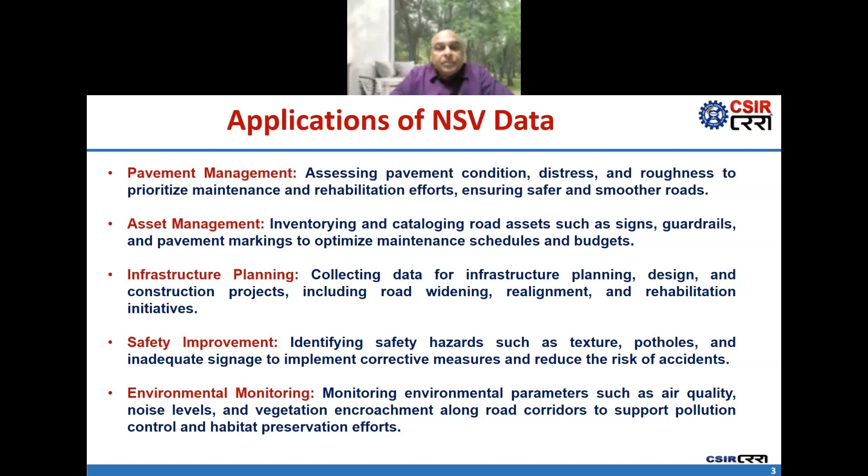So if you are monitoring environmental parameters such as air quality, noise levels, and vegetation encroachment along road corridors, we can support the pollution control and habitat preservation efforts also. So this is a new thing. So we can ask the NSV OEMs to put some more sensors on network survey vehicles so that we can collect environmental data in future. This is a new dimension for the work we are doing.

Yeah. So this slide is on the road safety related issues, which are very important nowadays on our Indian roads. We are collecting a lot of parameters using the network survey vehicle system. But right now we are just using the network survey vehicle data for road maintenance and planning purposes, not for road safety audit purposes, but we can use this technology for road safety audit also.

iRAP is one initiative where you can utilize this data. Friction data you can get indirectly using the network survey vehicle in terms of the macro texture depth. We can get the information related to the cross fall, hilliness, that is in terms of rise and fall data, edge deformation, that is in terms of the pavement surface distresses. We are collecting longitudinal unevenness, that is the riding quality, the longitudinal profile of the road, and curvature, that is the horizontal curvature.

We can ensure that the curvature is adequate. Using the network survey vehicle we are collecting the rut depth information through the transverse profile to know the maximum point of depressions along the wheel path. Similarly, we are getting the crack information, the pothole information, macro texture information. All this data is very useful, it will be very accurate, and we can put all this information into the available models related to road safety.

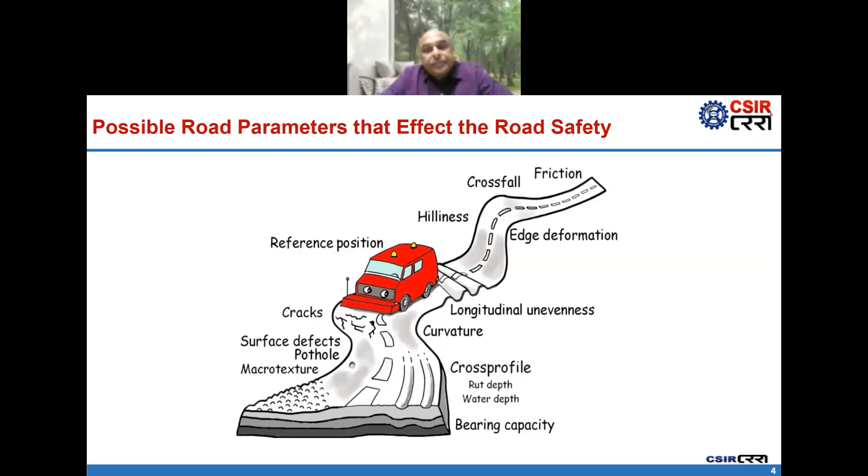So this is one aspect related to the usefulness of the network survey vehicle data, which is very important. I always call this the mantra of maintenance management: pay now or pay more later. We have various stages of road maintenance. The first stage is routine maintenance. The second stage we call preventive maintenance. Then periodic maintenance. Then minor rehabilitation, major rehabilitation, and reconstruction.

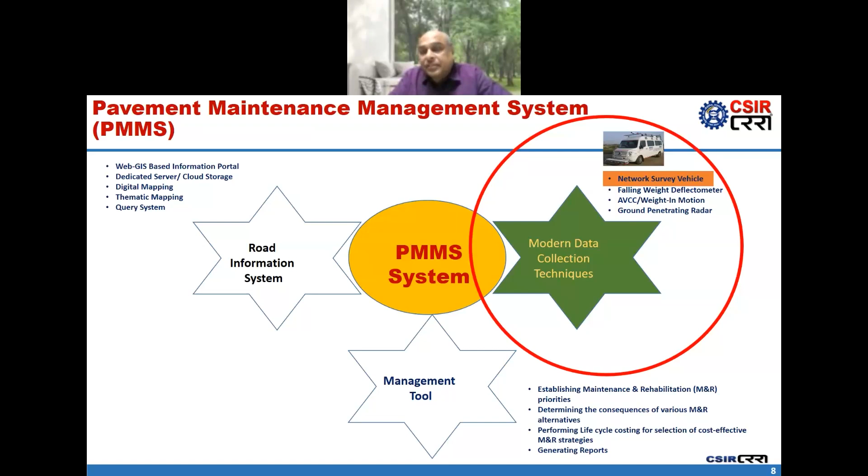Yeah, so I am going to focus only on the modern data collection part, and specifically on the network survey vehicle. This slide actually has a complete 15-day course at CRRI. So today I am just touching only one part, the network survey vehicle system, which I am going to give you insight into. Yeah, so network survey vehicle system. So this is actually the topic; with this background I start.

Actually I am getting some messages, black messages here, and because of that I am getting some difficulty in going to the next slide. Mm, yeah.

Using this technology, which we brought from Australia at that time, we could survey 40,000 kilometers of national highways covering all states of the country, and then a very beautiful web GIS-based national highway system was delivered to the Ministry of Road Transport and Highways in the year 2010. The second system we purchased in the year 2010. This system we used for another study for the Golden Quadrilateral road network. The aim was to develop a management system for high-speed road corridors at that time with the help

of CSIR funding. So if we see broadly, all network survey vehicle systems have the capacity to survey at a speed of 100 km per hour. That means from the minimum 20 km per hour speed; I will also tell you why the minimum speed of 20 km per hour is required. But maximum we can go up to 100 km per hour if your traffic conditions permit you.

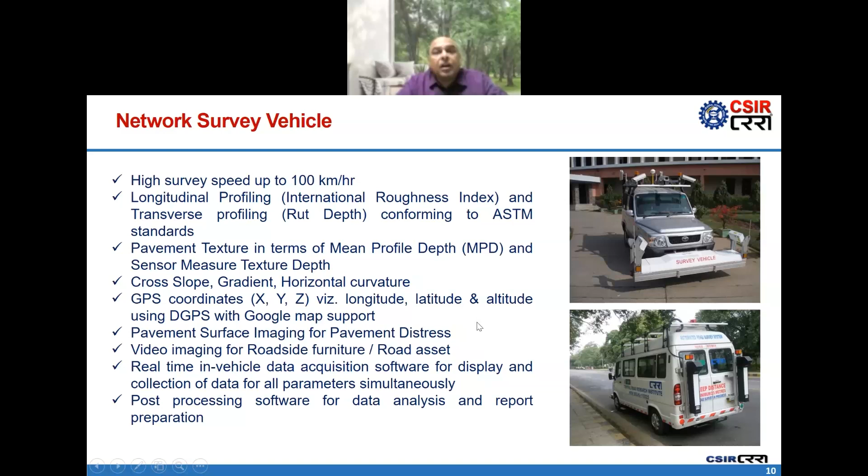Yeah. So broadly, this is our network survey vehicle which we are using. Most network survey vehicles look like the screen you are seeing here. In the front of this network survey vehicle, you can see one laser profilometer. This is a state-of-the-art system, I must say. This laser profilometer has two laser sensors on either end, so that using these two laser sensors, we are generating the longitudinal profile of the road along the wheel path. So when we are moving this survey vehicle in a lane on our national highway, we are getting the longitudinal profile of the left wheel path and right wheel path.

Both wheel path longitudinal profiles we are getting, and then we are using specialized software to analyze the longitudinal profile of both wheel paths to get the International Roughness Index, which we call the IRI value, in meter per kilometer. So this is how this technology works, and the minimum speed prescribed for collection of this information is 20 km per hour.

Because if you are moving below 20 km per hour, the accelerometer present on the top of the laser sensor doesn't work because of the low vibrations, and your results are not reliable. So the most recommended speed for laser profilometers is more than 20 km per hour, and you can go up to 100 km per hour depending upon the traffic conditions.

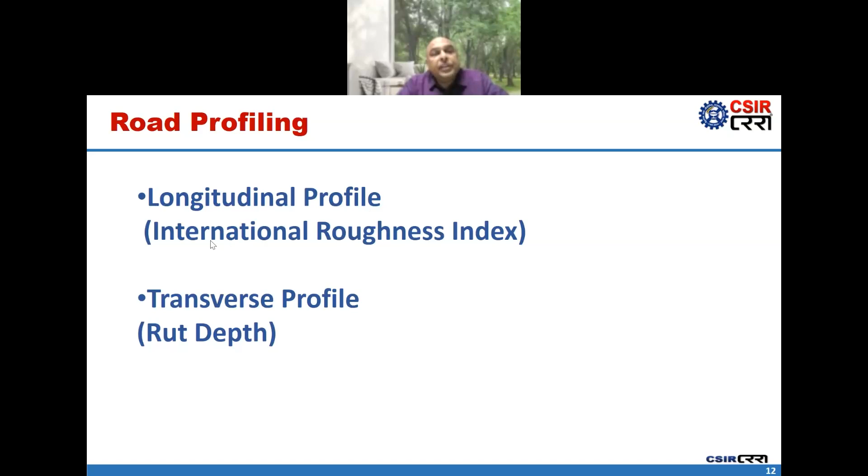Now I will go into more detail and give you some idea and some precautions while collecting these things. Longitudinal profiling, as I mentioned, using the laser profilometer will give you the International Roughness Index, and the transverse profile with the back lasers will give you the rut depth information.

Now let us see road profiling, the measurement of the longitudinal profile, and its accuracy. The laser profilometer here is as per ASTM E950 Class 1 category. What does it mean? Class 1 category means that you are generating the profile of the road at an interval of 25 millimeters, with the highest level of accuracy in the measurement. If your measurement interval is more than 25 millimeters, that comes under the Class 2 category.

So as per our IRC codes and the recommendations for riding quality measurements, we go with the Class 1 category, and all lasers capture the longitudinal profile at an interval of 25 millimeters. Finally, after applying the appropriate algorithms, which is an automatic process, we get the International Roughness Index, IRI, in meter per kilometer. And if we want to convert this IRI to the equivalent bump indicator roughness index, which is our old practice in India, we can use this equation.

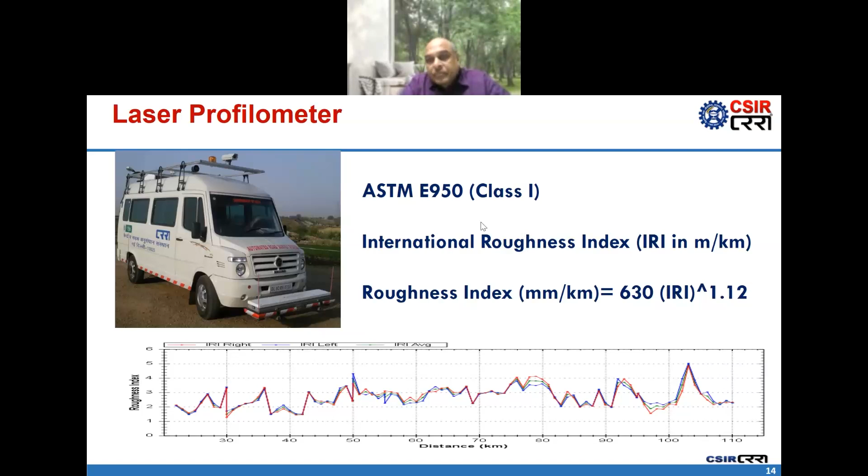Another important thing is that while collecting data, these laser sensors are continuously measuring the height from their position to the road surface. This is the principle of how these laser sensors collect information: the laser sensor sends one signal to the road surface, we get the reflected signal back, and it measures the height from its position.

We also have one accelerometer on top of each laser sensor, which measures the acceleration, that is, the body movement of the vehicle. In physics, if we double integrate acceleration, we get the vertical displacement. So we measure the acceleration due to body movement, while the laser measures the height from its position to the road surface. Finally, we double integrate the accelerometer value and subtract it from the laser results to get the accurate road profile.

One way to check whether your machine is giving you the correct riding quality is to put a known height block between the laser and the road surface. Suppose you put a 25 millimeter block, then your system should record 25 millimeter irregularity. If you put a 50 millimeter block, the system should tell you 50 millimeter. But if you put a 25 millimeter block and your system tells you 30 millimeter or 20 millimeter, that means your machine is not properly calibrated.

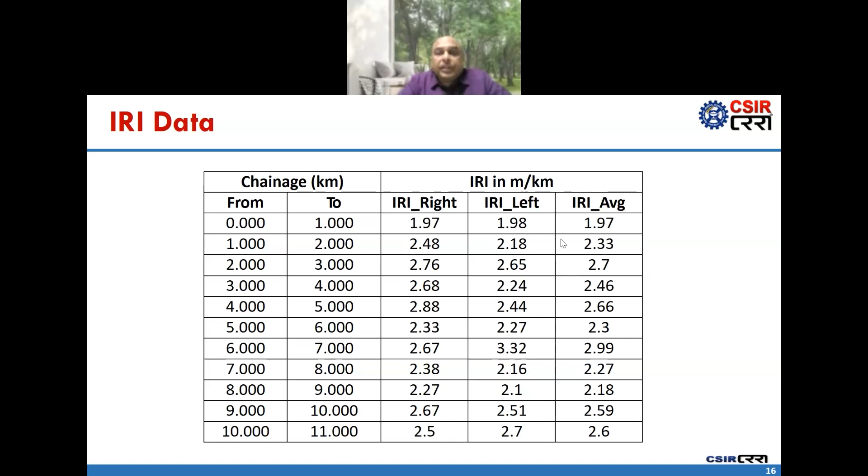I think my screen is not visible.

If you want to cross check or validate the results from the network survey vehicle, you can use any one of these equipments for comparison. These equipments are basically used for calibration of the fifth wheel bump indicator, but you can also use them for validation of the network survey vehicle IRI measurements. This is how we do validation of the network survey vehicle at CRRI.

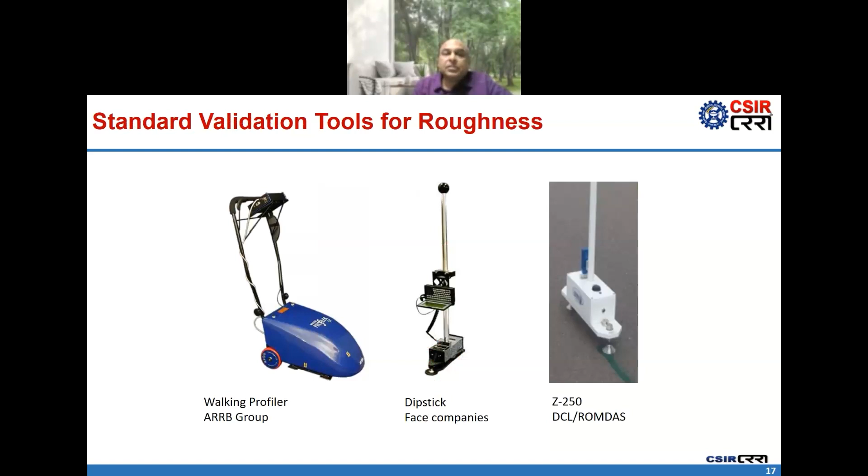Now let us see the road profiling in transverse direction. Again, this is a very important parameter, transverse profiling.

Yeah, again... so still you can see my screen? Sorry. Yes, it's visible, it's visible.

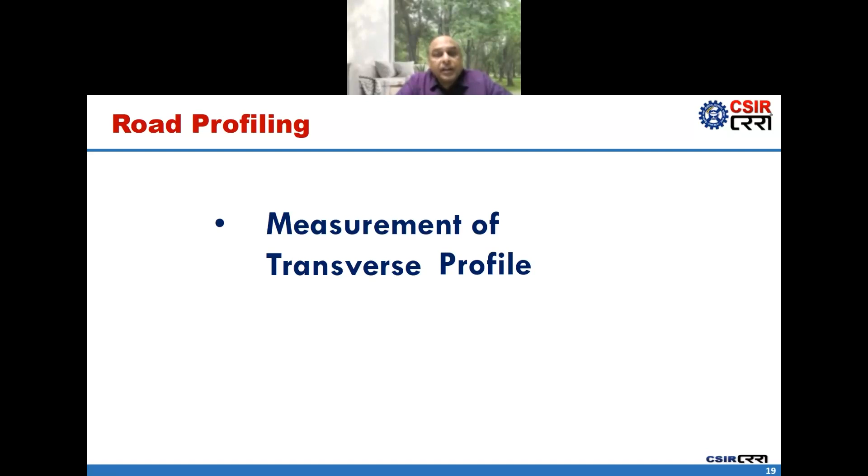So now I think you have some idea about the longitudinal profile, the riding quality, IRI, left wheel path, right wheel path. Now let us see the transverse profiling. How are we doing the transverse profiling?

In transverse profiling, I am seeing three systems in the market. One system is this first one, the first network survey vehicle in CRRI, but some other people are also using the same technique because they want to generate the transverse profile, meaning they want to make a profile of a 3.5 meter lane.

The second technology, which we have been using for the last 10 years, is called the laser rut measurement system. Here we have two laser sensors emitting laser waves, and across 3.5 meters we generate the transverse profile with 1280 points. This number is very high, so the transverse resolution between 2 points is less than 3 millimeters, and we get accurate results for rut depth measurement.

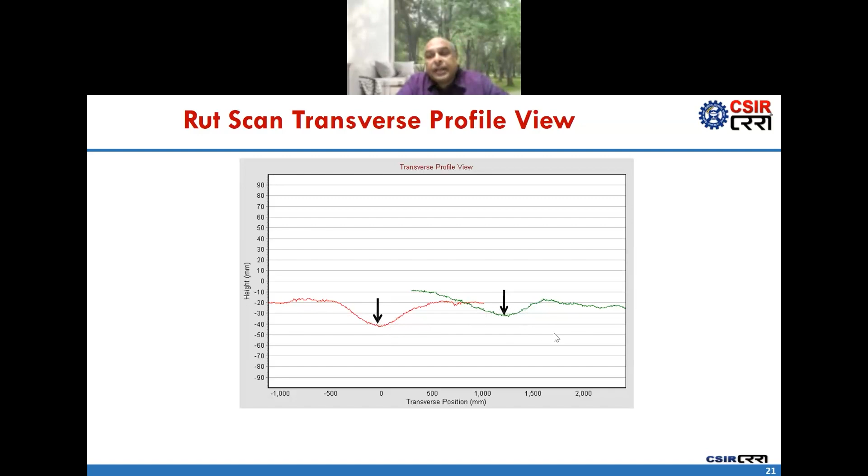Again, if you want to validate these results, the only way is the 3-meter straight edge, the conventional method used to measure the rut depth.

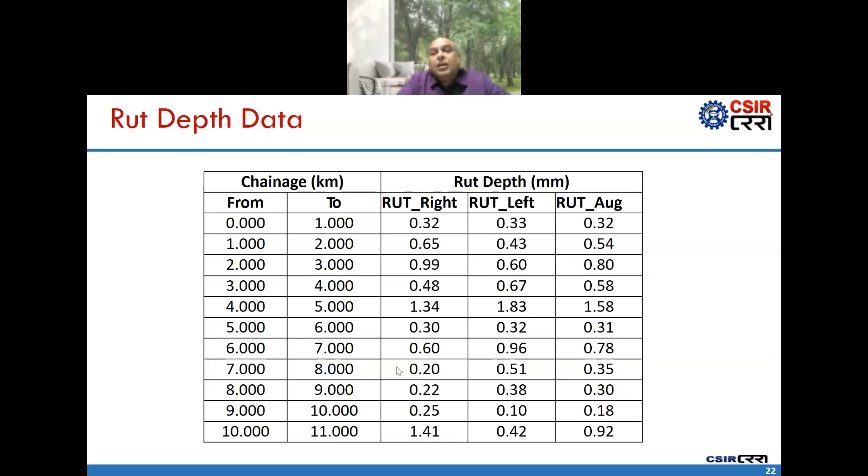This is the only way we can compare the results from the conventional method with the network survey vehicle, to know whether we are getting accurate results or not.

The third one is road geometry measurement with the network survey vehicle system. We use this geometry data in road safety audit related studies, and also in HDM4 for life cycle cost analysis and maintenance management. So we want to know the gradient in percentage, the rise and fall in meter per kilometer, rise and fall number per kilometer, cross slope percentage, and horizontal curvature in degrees per kilometer.

Gyroscope and accelerometer sensors are fitted in network survey vehicle systems that measure changes in orientation and acceleration of the survey vehicle. This is common hardware used to measure geometry, whether a 2D or 3D system. All manufacturers use the same type of sensors for measuring geometry data, so this is an important aspect.

Rise and fall we want to know in meter per kilometer using the network survey vehicle. Using the same geometry system, we want to know the number of rise and fall events, because this information is very important when using the HDM4 tool. We also want the number of rise and fall per kilometer.

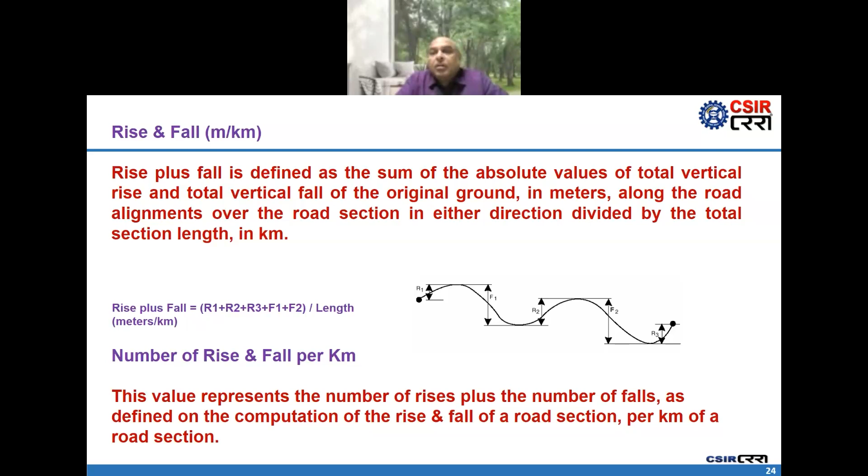But in some network survey vehicle providers, I am seeing that this information is missing. In the absence of these parameters, it will be difficult to run HDM4, and your results will not be accurate. So we have to make sure that when collecting data, it is useful in all aspects, whether for calculating PCI, running HDM4, or other management tools, so there is no lack of information.

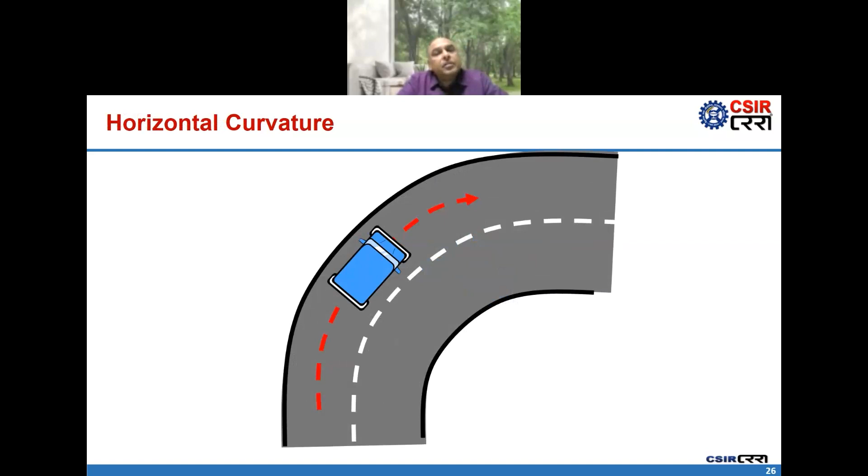Camber information we get using the network survey vehicle, no issue. Horizontal curvature we also get with the network survey vehicle system. This data is processed kilometer-wise for gradient, camber, curvature, latitude, longitude, and altitude information, all automatically processed as per the desired interval.

But the question here is how we validate it. We have a mechanism to validate this geometry data. The best way is if you have known gradients and known curvatures on your highways as per your drawing, you first compare with those results. Otherwise, the total station is the last option for you to validate your results. This is how we are doing it.

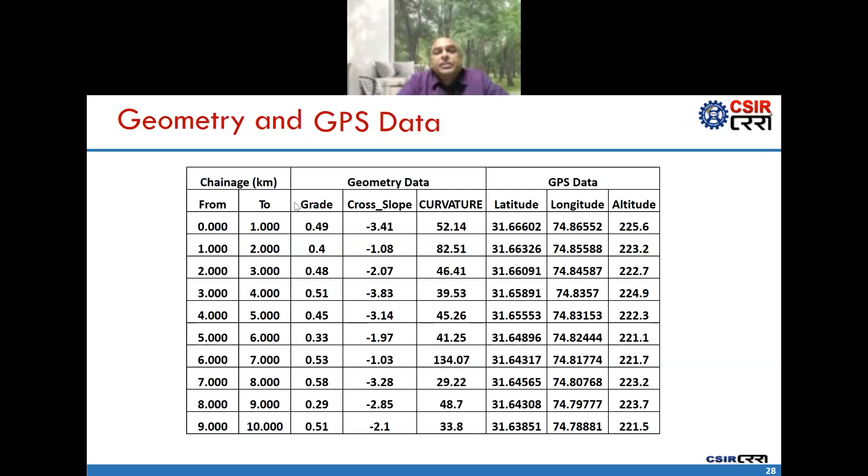The third one is measurement of pavement surface distresses. This is a very important part. If you want to collect distress information like cracking or number of potholes, doing this manually is not possible with traffic and is time consuming. This is the only parameter which distinguishes between a 2D system and a 3D system.

If you want to measure IRI, using a laser profilometer it is the same for 2D and 3D systems. If you want to measure geometry, it is also the same for both systems. But if you want to do pavement surface distress measurement, here we have some change.

In the first case, a 2D system, you see only two cameras facing downwards, capturing images of the pavement surface. That means you are not collecting depth information of the pothole or crack, only the area - what area is cracked, or what is the area of the pothole.

But if you are interested to know the width of the crack, or the depth of the crack, or the depth of the pothole, meaning you want to quantify severity level, then you have to go with the 3D system. But right now, I am not seeing any code where we analyze data with respect to severity level - we only know the extent, the percentage, not the severity level.

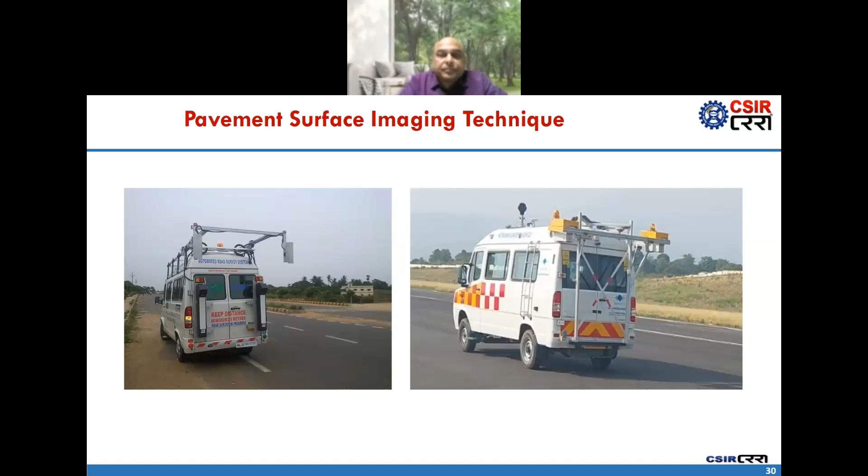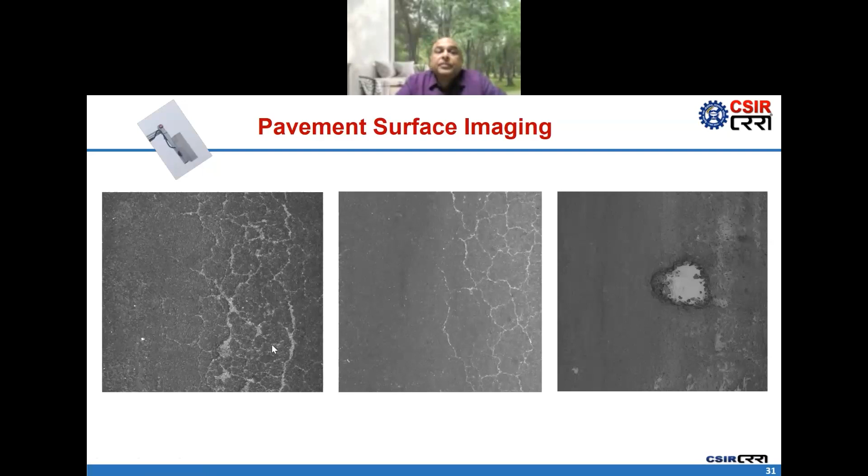So these are some images which we are collecting using the 2D system. You can see here the cracks, some wide cracks, some fine cracks, and you are seeing the pothole. But this is a 2D system. If you are using a 3D system, then that system will tell you the width of the crack, or depth of the crack, and the depth of the pothole also. So this is the difference between the 2D system and the 3D system.

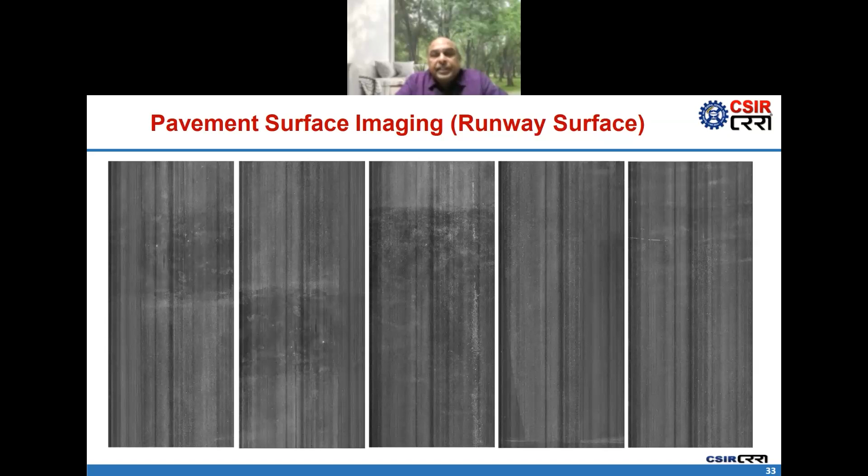So this is another system I am showing right now. This is the runway we are doing. Not only the highways or state roads, we are collecting the data using network survey vehicle, but recently I am working on a study with 10 airports. So we are evaluating the runways, taxiways, and apron area also using the network survey vehicle. So this is one recent image of the runways. These are the other images of the runways using the same technology. This is actually the 3D system which we are using here, because we want to know the severity level also.

But in my opinion, it depends how many cameras you are putting. Sometimes we have only a front camera because we are more interested in the carriageway details up to the shoulder. But if you want to see the right of way information, you can put one left camera and a right camera also. But in my opinion, there is no need of a back camera. Now in the new survey vehicle systems, which we call 3D systems, people are using a 360-degree camera, and in this 360-degree camera we are getting the image of the sky also.

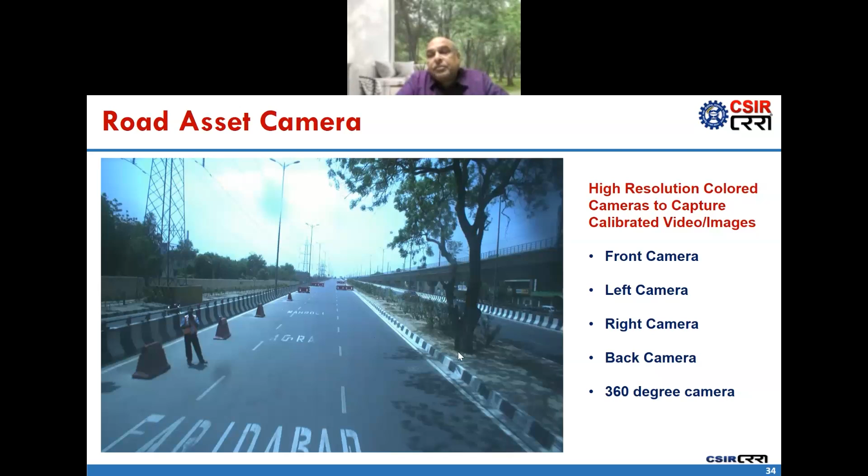And again, if you want to validate the results, it is very simple. You just measure it by tape and by the system and you can compare the results. So here the validation part is very simple for all of us.

Now another dimension: for all parameters, whether it is IRI or texture or geometry or distresses, we want to pinpoint the location in terms of the chainage, that is the distance with reference to the kilometer stones, or the geographical referencing system using global positioning system. We want to map the roads. So we recommend using a real-time differential positioning system so that you will have accurate results in terms of longitude, latitude, and altitude.

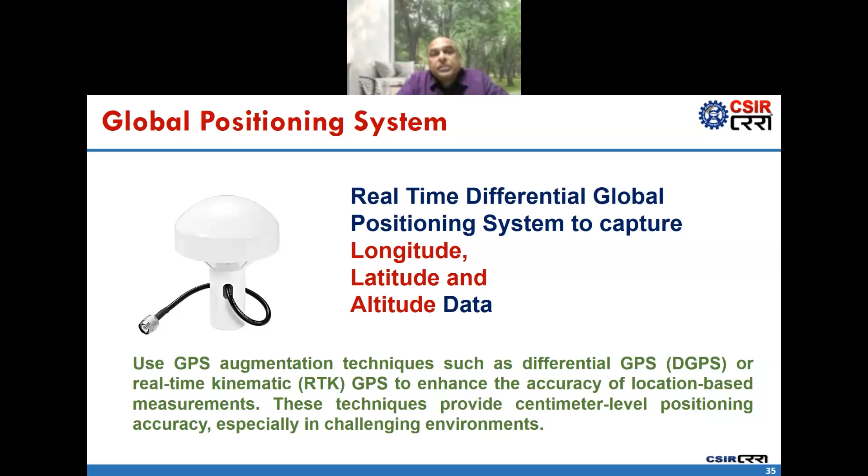And if you are using the real-time differential GPS, which is the ultimate technology, then after creating the map, if you superimpose it on Google Earth, you will see your road alignment perfectly matching on the Google map. But if you are using a simple GPS, then it will not match. So this is how you can enhance the accuracy of location-based measurements using the real-time differential GPS. So we recommend going with a global positioning system which has real-time differential capacity.

Similarly, all measurements depend on it. Suppose you are doing the IRI, and if your distance measurement is not correct, then your IRI riding quality results will not be correct. So you need to have a very accurate distance measuring equipment. Sometimes what people do is just check the laser profilometer, whether it is correctly measuring the height, 25 millimeter or 50 millimeter, but they forget to check the distance measurement of the network survey vehicle.

So if you are not sure about the distance measurement, and your system is measuring a shorter or a longer distance, then again you are not getting the true IRI. So we have to be very careful. Distance measurement is very easy to validate with a known distance. You can just validate the distance measured by the network survey system.

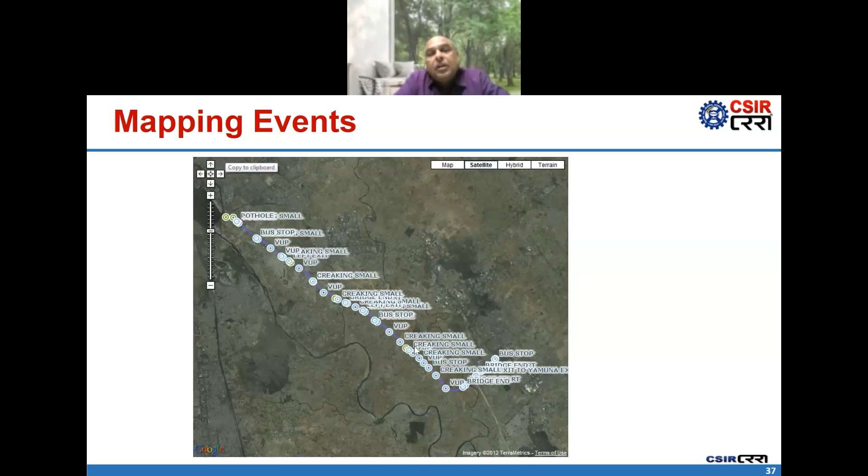So now let us see some data, like mapping events. Suppose we are running the network survey vehicle on particular roads, and we are getting so many features. We are pressing the keys. Some bus stop is there, vehicle underpass is there, sometimes a pothole is there. So we have an inbuilt key system. We can press the appropriate key, and the location of that event, distress, defect, or any road inventory will be marked at that location.

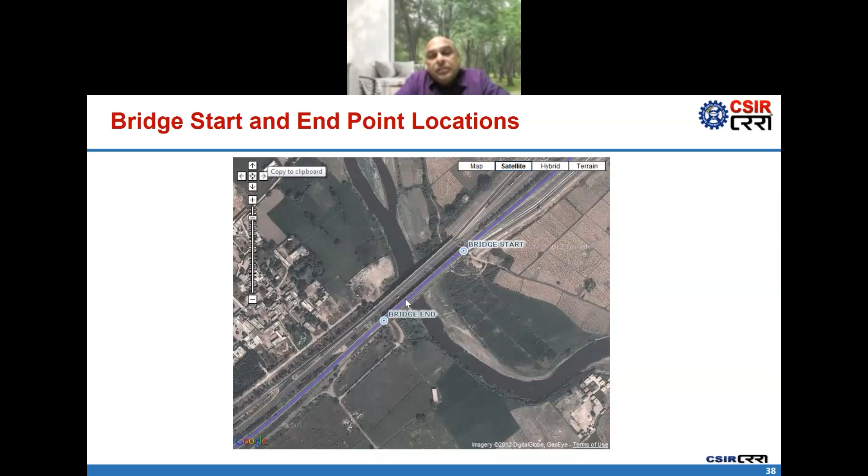So we have that system, like here, the bridge start point and end point. The blue line you are seeing here is the network survey vehicle longitude, latitude, and altitude data. We have superimposed this data on Google Earth for convenience. Like the vehicle underpass, we have marked here. Bus stop, the operator has marked here. So the bus stop is visible in Google Earth also.

So at the time of survey itself, you can do some inventorization and create GIS layers of different types of events. If you want to create a layer for culverts, you can just make a key for the culvert, press that key, and the location of all culverts will be marked on the GIS map. But you can also do this work later, at the time of processing the data in the lab itself.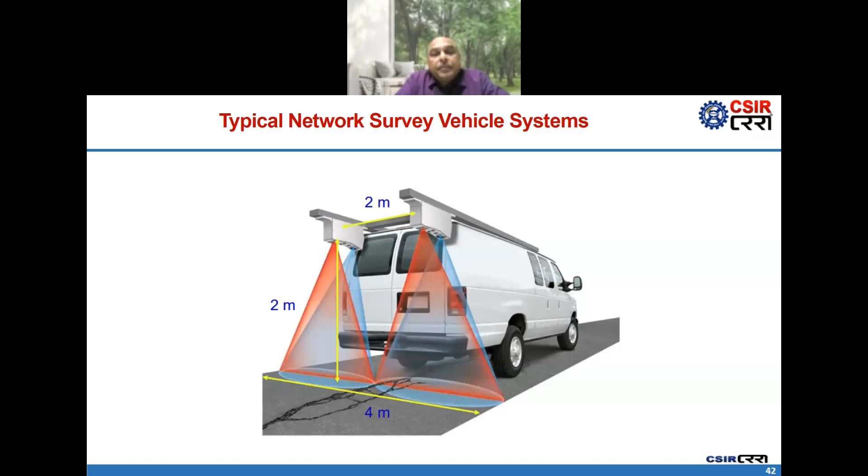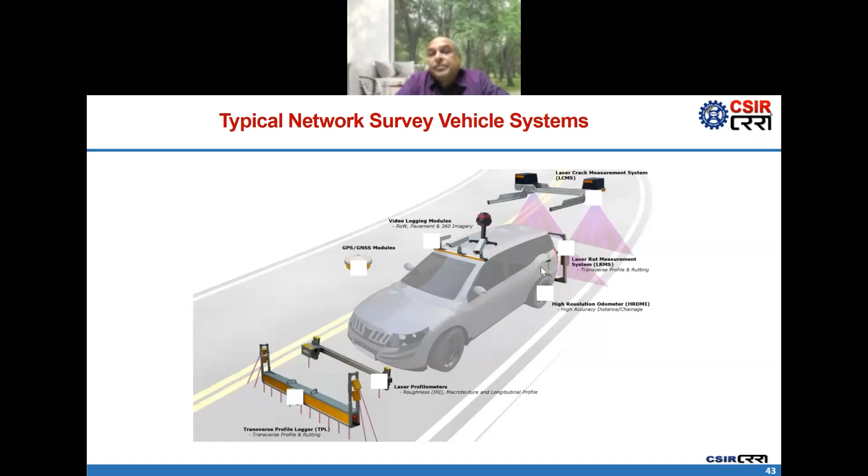With a 2D system, you will get the same results for IRI, texture, geometry, or right of way information. There is no difference between 2D and 3D. These are some systems I am seeing in the market. In this system, they have a 360-degree camera on top, and on the back side they have an LCMS system. This is another technology I'm using on airports right now. This is a lidar based system. They call it a 3D system because it can give us depth information.

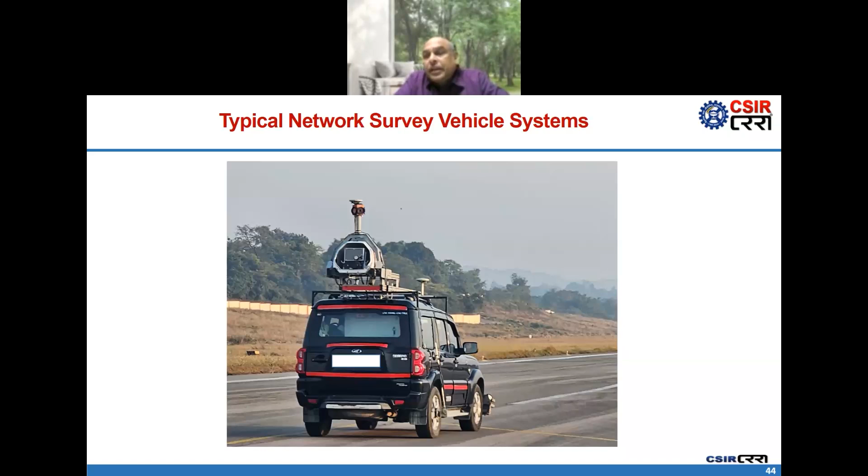So the thumb rule is, if the system is able to give me the depth information of the pothole, that means it is a 3D system. So many systems of different shapes and sizes are available in the market. But this is something very unique I could see from the lidar based systems, if you really want to develop the digital twin of your road network.

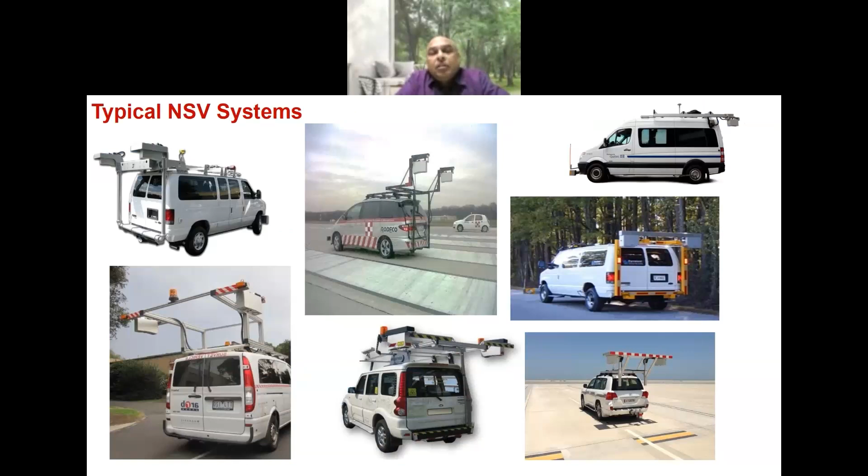So this was all about the network survey vehicle. I think I have covered all the aspects related to the measured parameters and how to ensure the accuracy in the measurements. And now, how to use the data. This is very important. Recently we have one new code: if you have collected the data using the network survey vehicle, we have the new code IRC 82 2023. Recently it was released by the Honorable Minister in Raipur.

So let us just talk about highways only. We have selected 6 parameters to rate a newly constructed road, or the existing road for maintenance planning purposes. One parameter is cracking, the second one is raveling, then potholes, patching, rut depth, and IRI. These are the most dominating parameters we found on our highways. We have categories also.

Suppose my cracking level is less than 5%, I call it excellent to good condition, that means 0 to 5%. Raveling is 0 to 1%. Pothole nil; earlier it used to be 1 to 2, if you see the old code. But now for highways, if you want to say it is an excellent road or a new road, it should be nil. Then similarly patching 0 to 1, rutting 0 to 5 mm, and IRI as per our IRC SP16 code.

Less than 2.55 IRI, which you are getting from the laser profilometer, means the road is excellent to good. If it is up to 3.3 IRI, it is satisfactory to fair, and more than 3.3, it is poor. Based on these boundary conditions for the 6 parameters, we have developed the PCI models to convert these ratings into a 0 to 100 scale, where 0 is the failed condition and 100 is the excellent condition of the road.

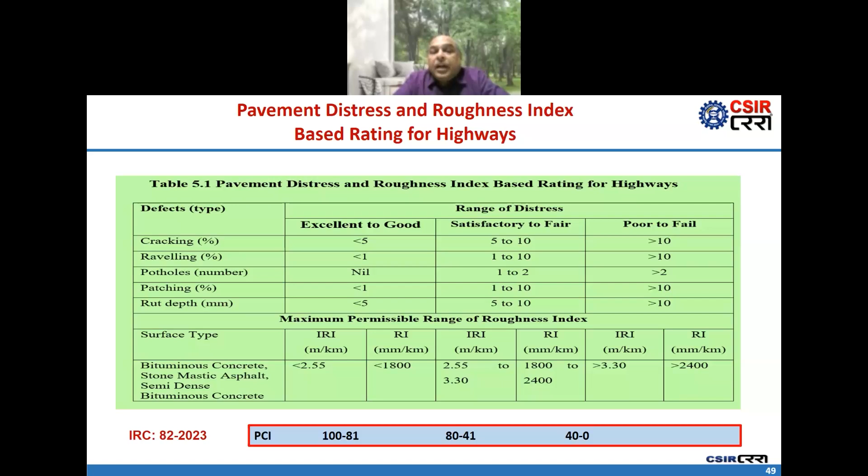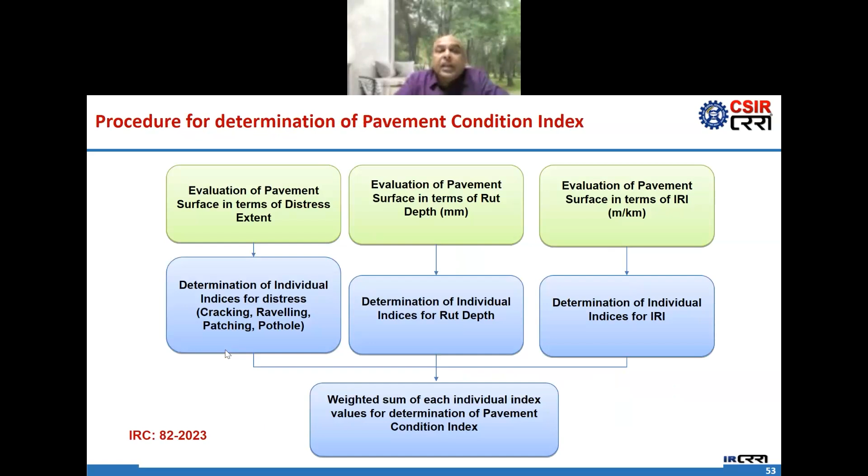Similarly, in the case of rural roads and urban roads, we have different boundary conditions and PCI curves. So finally, these are the 6 parameters, and we have excellent to failed condition, where 100 is excellent and 0 is failed. Based on the methodology given in IRC 82-2023, we calculate the PCI value of each parameter: PCI for IRI, pothole, rut depth, cracking, raveling, and patchwork. Then finally, we give weightages to each PCI value.

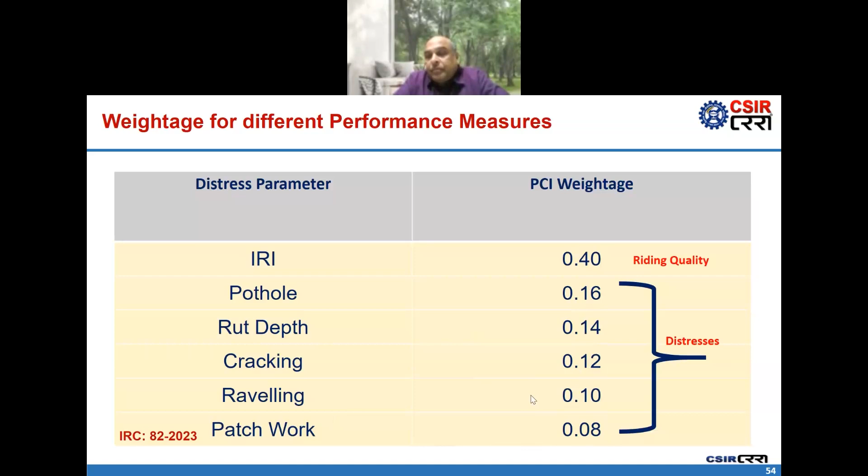IRI gets the maximum weightage of 0.4, pothole the second highest at 0.16, rut depth 0.14, cracking 0.12, raveling 0.10, and patchwork 0.08. Based on these weightages, finally we get a PCI score. Suppose my road is newly constructed and I am getting a score of 90 to 100. That means this road doesn't require any major maintenance, only routine maintenance like cleaning, drainage cleaning, all these things.

Suppose I am getting a score between 80 to 90, it requires preventive maintenance; 40 to 60, minor rehabilitation; and below this, major rehabilitation.

Just a minute. I don't know whether it is visible to you or not.

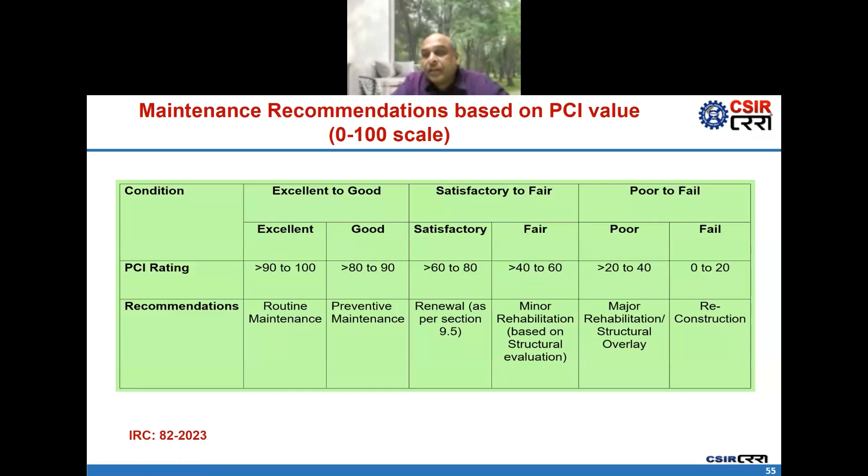So poor is 20 to 40, and if your road is getting a score of 0 to 20 based on the 6 parameters I have mentioned, it requires reconstruction. We have also given one Excel utility table along with this IRC code. Suppose your road is newly constructed, there is no cracking, zero cracking, raveling is again 0.

Okay. Pothole is 0, patching is 0, rut depth is 0, IRI is 2.5 meter per kilometer, which is very good. That means you are automatically getting score 100. This score you are getting automatically with the utility which we have given along with the code. And in that way, the system is suggesting you that only routine maintenance is required.

Similarly, you can see the 20 examples I am putting here in front of you. These are the real roads. Suppose in a road you are having 5% cracking, 2% raveling, 0 pothole, 3% patching, 4 rutting, IRI is 6, then you are getting 52.77 score. And the system is suggesting you that minor rehabilitation is required.

But for minor rehabilitation decision, if you just read the code, you have to go with the structural evaluation first, then the system will tell you exactly what minor rehabilitation or what type of overlay layer is required to restore it back to the good condition.

So in that way, now you have something in your hand with the release of this document IRC 82-2023, that if you have collected the NSV data, you are getting cracking data, raveling data, pothole, patching, rut depth, IRI, all 6 parameter data from the NSV. So why not put all this data into this utility, rate our roads and find out what type of maintenance is required. So this is one very good initiative.

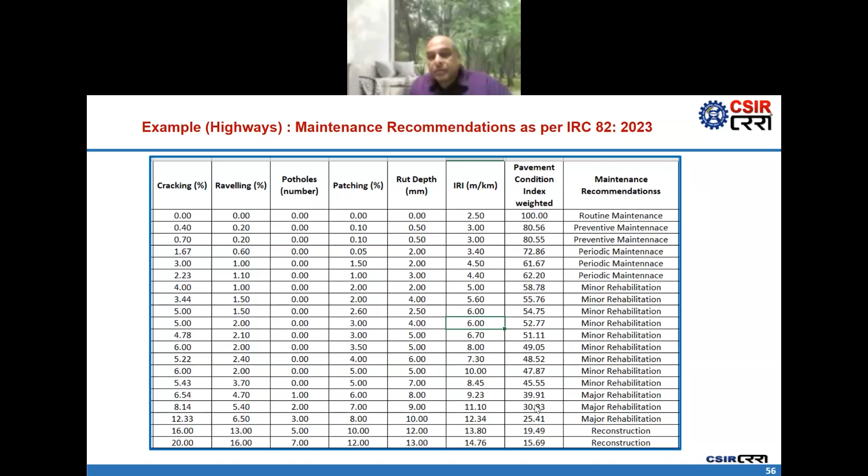So now another code we have published, the guidelines for road asset management. One thing I forgot actually. The models which we have developed, this is my research. It is an SCI publication also. I have converted my research into the IRC 82 code, and we have validated these results as per the actual field conditions with the real data.

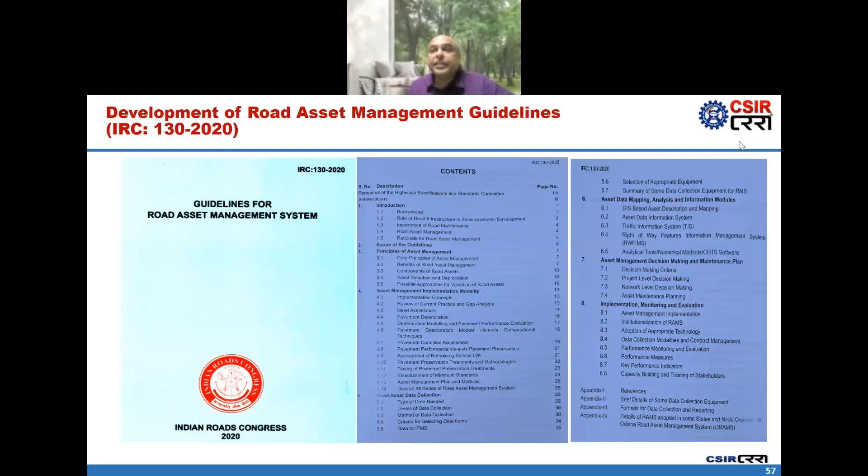And this is another code recently released, developed by the ministry, that is the road asset management system. If you go to chapter number 5, which was written by me, road asset data collection, it includes all information related to the network survey vehicle. I am just giving you a glimpse of this document. If you want to develop a road asset management system, it has various modules related to traffic, pavement, bridges, toll, accident, environment, and other documentation.

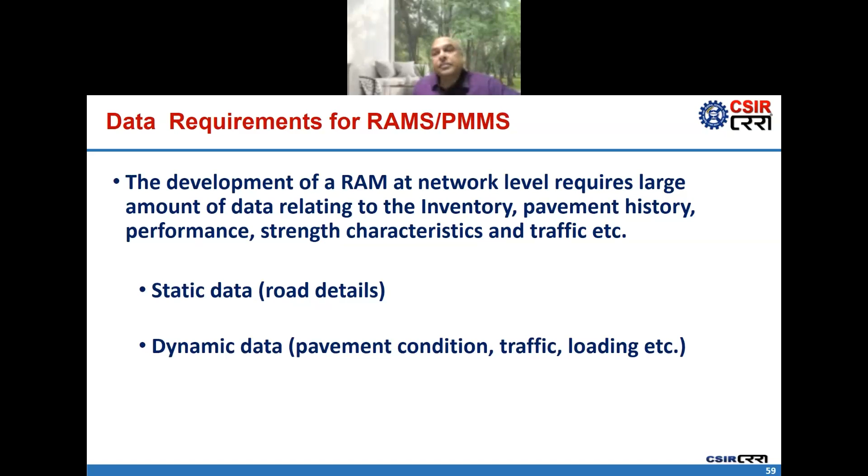Query system is there, and then how you are going to link with HDM-4 so that you can do life cycle cost analysis or economic based analysis to optimize the economic benefits in terms of minimizing the maintenance cost and road user cost. In this document we are giving details of the data requirements for the RAMS. Static data you can collect from the records, and dynamic data from the network survey vehicle and other means like falling weight deflectometer, traffic counter-cum-classifiers, weigh in motion system or GPR technology.

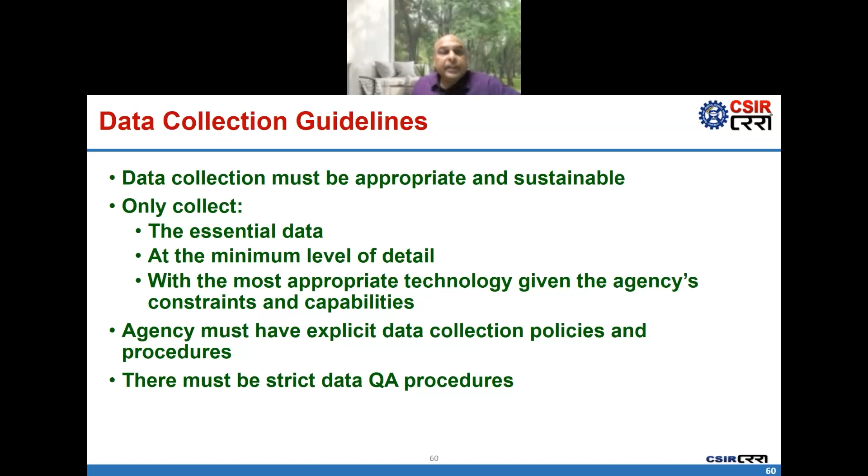And there are some guidelines that we should not collect excessive data. We should concentrate on how we are going to analyze the data so that we can minimize the efforts in data collection and make the data collection activity more sustainable. We have also given the frequency of the data collection.

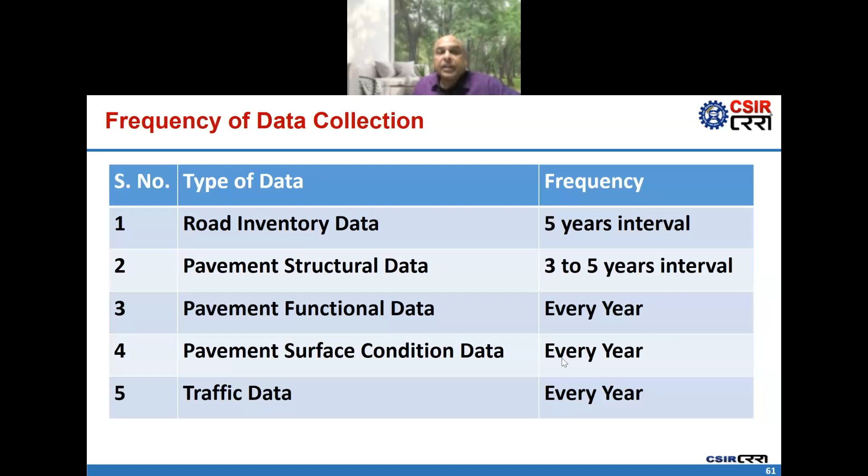Based on our experience, the most appropriate time for data collection is after monsoon. If you are collecting the condition data, functional data every year, you should collect after monsoon, okay? Road inventory you can collect after 5 years, structural data 3 to 5 years, pavement functional data every year, pavement surface condition every year, and traffic data every year. If you read this chapter, you will have answers to all of your queries.

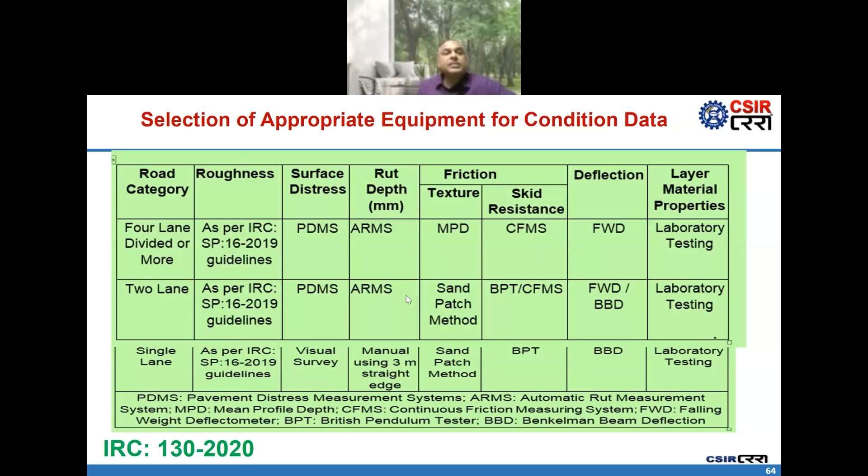If you want to select the appropriate technology for roughness measurement, distresses or friction, or how to measure the crust details, where to get the cost details, policy related, geometry related, or if I am having a 4-lane divided carriageway, what technology shall I use? Or for a 2-lane undivided or single lane road, what method shall I adopt? All these things are there in this document. You can just go through it.

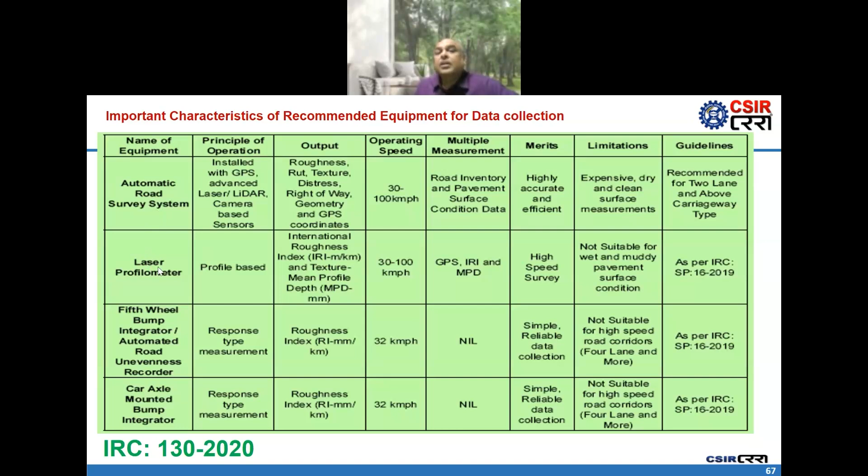And also in this document we have given some special features of automated road survey system or network survey vehicle, laser profilometer, what is the speed range and everything.

And the HDM-4 software, I'm just giving you very quick details: all data, network survey vehicle data, first you can use the IRC 82 document to rate the roads, to know the tentative maintenance strategies.

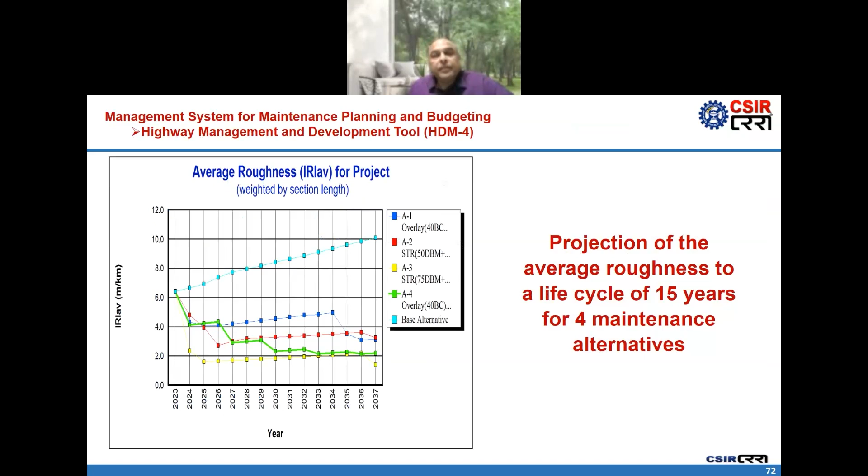But if you want to do the economic analysis, then you have to go with the Highway Development and Management tool. The World Bank has developed this tool, and most of the time, at the state level where the funding is from the World Bank, we are using this tool to develop the annual maintenance plans. So the idea here is to minimize the total transportation cost and maximize benefits within the budget constraints. So this is what we are doing using this code. And these are some studies.

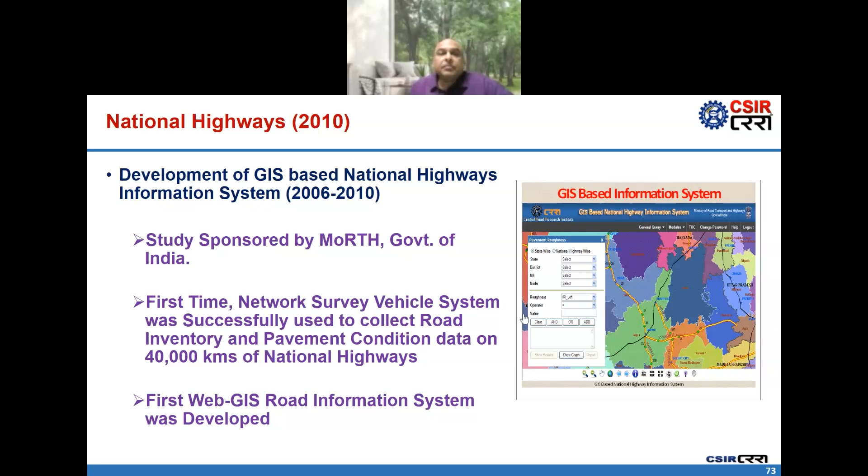I mentioned that the first study was initiated by the Ministry of Road Transport and Highways in 2006 and completed in 2010. We developed this GIS-based National Highway Information System, the first one with 40,000 kilometers of national highway data using the network survey vehicle system. Then the second one was the Golden Quadrilateral, the high-speed road corridors. And now, continuously from 2012, we are working with the Odisha government for the entire state.

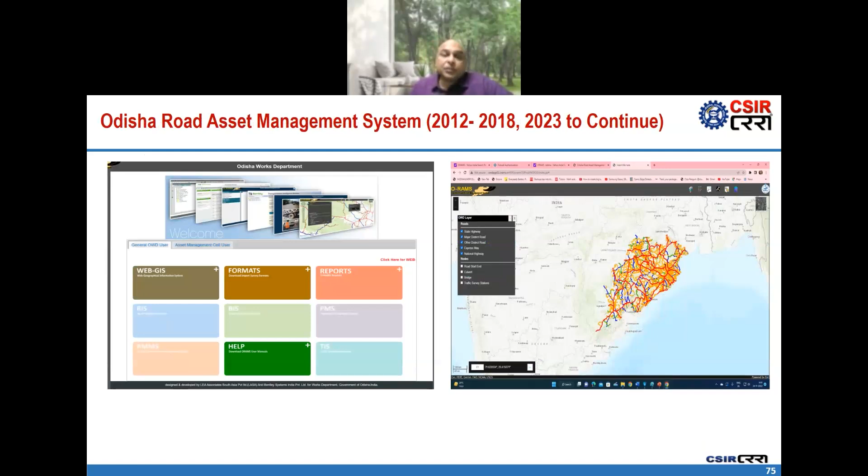We are covering state highways, MDR and ODR roads, and we are working with them on the Odisha Road Asset Management System. Presently also we are working with them. Recently, we completed 21,000 lane kilometers of data collection using the network survey vehicle in the last month itself. And now we are developing the annual maintenance plan.

In the year 2022, we developed the Kerala Road Maintenance Management System with the help of the network survey vehicle, falling weight deflectometer, other sources of data, and the HDM-4 software, and we have successfully delivered this project to them.

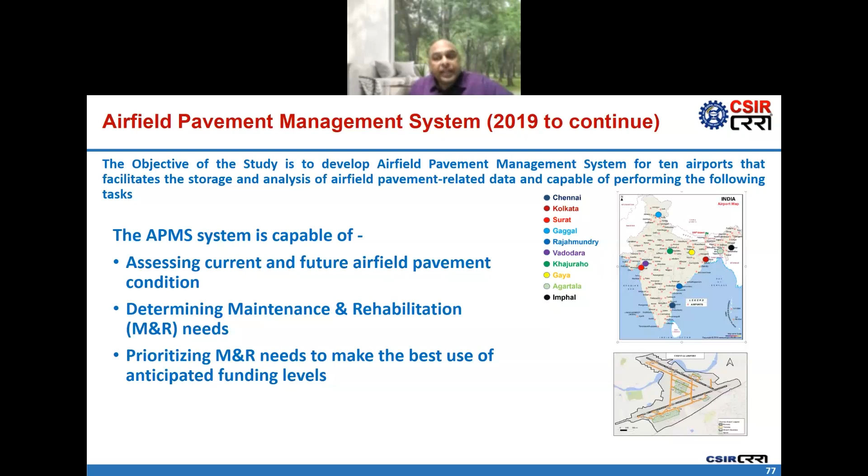Also, I am leading as project leader for 10 airports of India. We are developing an airfield pavement management system for the 10 airports. Here also we are utilizing the network survey vehicle system for condition monitoring, especially of the runways, as per the ICAO, International Civil Aviation Organization, guidelines. So these sites are very important.

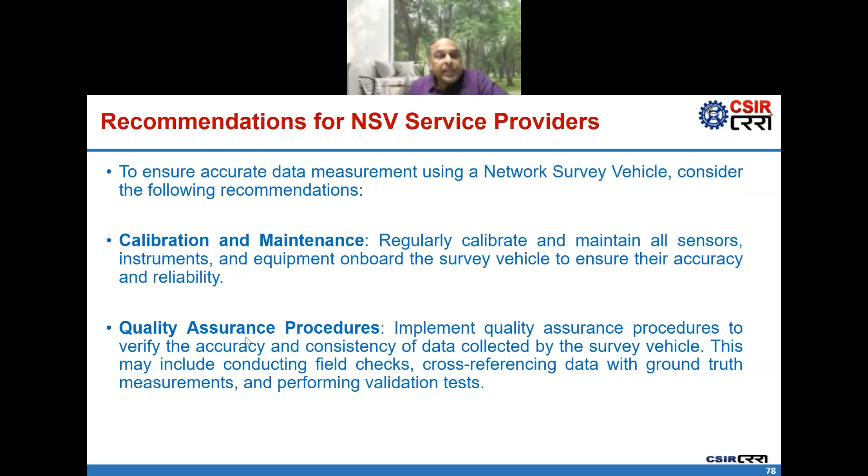Now I have some recommendations for the network survey vehicle service providers. One is that calibration and maintenance are required. They are doing calibration and maintenance, but they are not keeping the records, because whenever we ask them, they are not able to show us when the last calibration was done and what the results were. There must be some quality assurance procedures at the site itself. If I want to ensure whether the machine is properly calibrated, there must be some site checks also. This I always recommend.

A real-time monitoring system must be there to ensure that all the sensors are working at the site. GPS: as I mentioned, we want real-time differential GPS so that we get at least centimeter-level accuracy. And environmental conditions: they should take care of the environmental conditions at the time of data collection, so that good lighting conditions are available, and it should not be a rainy day. That badly affects data accuracy in measurement.

Training and skill development: most of the time I never see a training certificate of the operators. So this is missing. The NSV service provider must ensure that the person they deploy for data collection is properly trained, and if sometimes the results are not proper, he must be able to address all those things at the time of data collection itself.

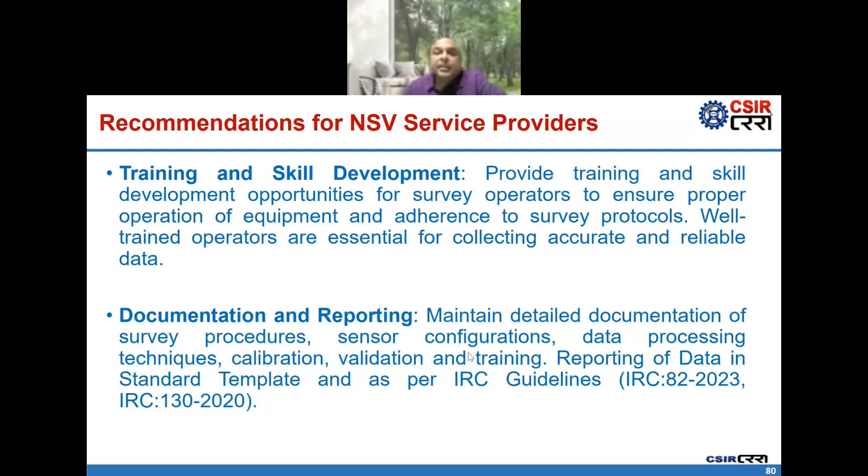Documentation and reporting is again very important. It is not just to collect the NSV data; there must be a data validation checks methodology, and we should finally analyze at least as per IRC 82 guidelines to get the PCI rating and the maintenance strategies. So these are some survey recommendations.

Again, calibration checks and ground truth verification are very much required. In Odisha we do ground truth verifications for some sample roads, and we are also doing quality control checks. And there must be a consistent speed also. This technology is good for 30 to 100 kilometers per hour, but as per our experience, for national highways, if you are collecting the data at 50 or 60 kilometers per hour, then you will get good results.

And weather considerations are very important. Adverse weather such as rain or poor lighting conditions can affect sensor performance and data quality.

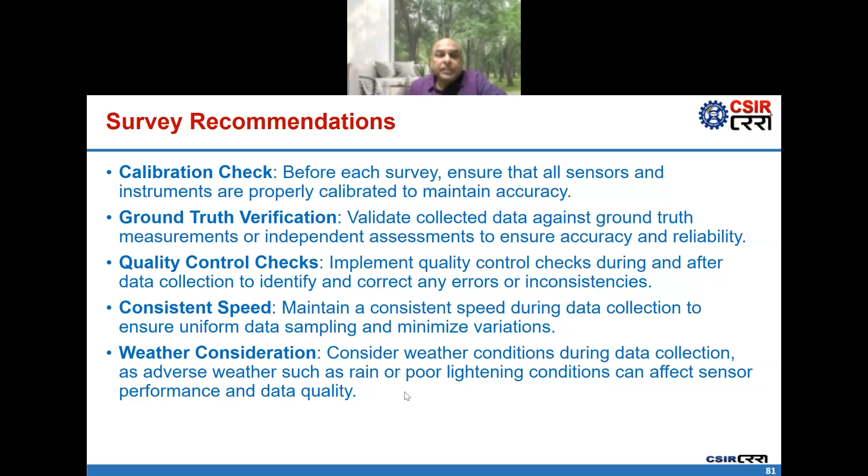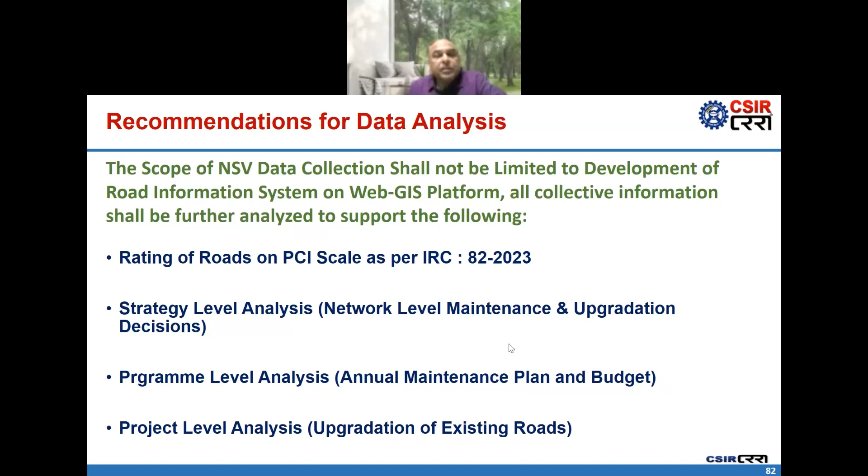But other than this, if you want for NHAI or some other organization, especially for NHAI, we can have some customized training program as per your and our convenience anytime. So, that's something. Thank you very much for your kind attention. Sorry, I think I have taken some extra time.

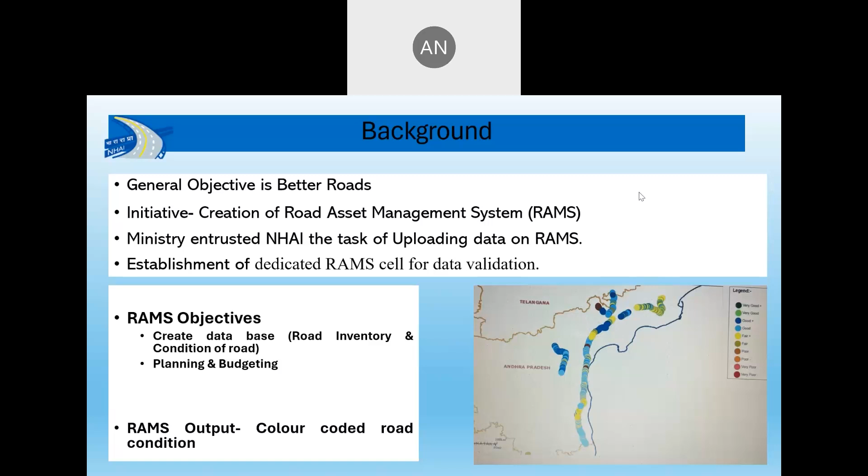The obligation of our data lake portal, which is managed by Messrs. MNEX, is just to transport the data from the field to our NHAI headquarters. They are not involved in the validation of this data.

The validation of data is done by the RAMS cell at NHAI headquarters, which examines the data for its completeness as per the template and its accuracy as per the video submitted. If the data is in accurate, acceptable form, it is uploaded into the RAMS portal; otherwise it is returned to the field unit for correction. This RAMS portal is a separate portal managed and handled by the ministry through their agency called Messrs. DXC. So these four are the overall stakeholders in this system.

Now we know the utility of NSV testing is huge, as sir has also mentioned. It has great potential - NSV testing can collect and analyze a lot of data which is not otherwise possible for us manually or any other way. This has been realized by the decision makers also.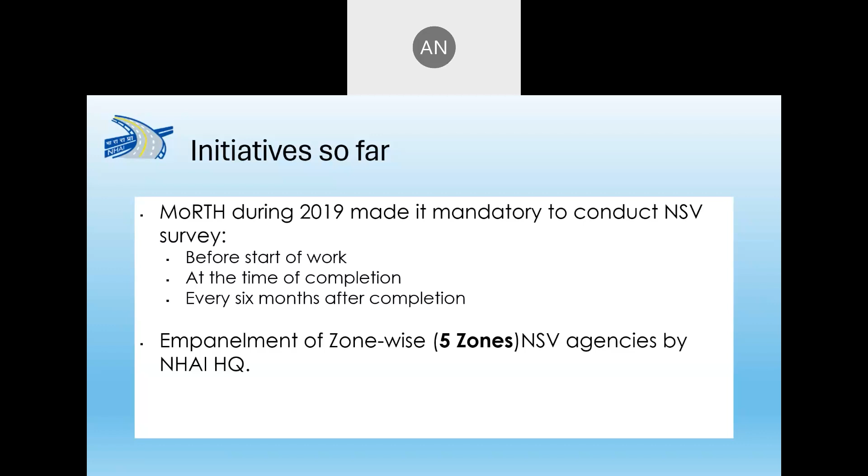Therefore the ministry in 2019 made it mandatory to conduct NSV survey at three stages: first before the start of work, second at the time of completion - that is before issue of PCC, we have to mandatorily conduct NSV - and after completion, every 6 months NSV tests have to be done. This is also being followed throughout our national highways.

However, we face some challenges during implementation of this NSV data collection and uploading. One slide has been kept showing these challenges. The main challenge we have faced in RAMS data uploading is that we are not getting the complete data of the entire NH network.

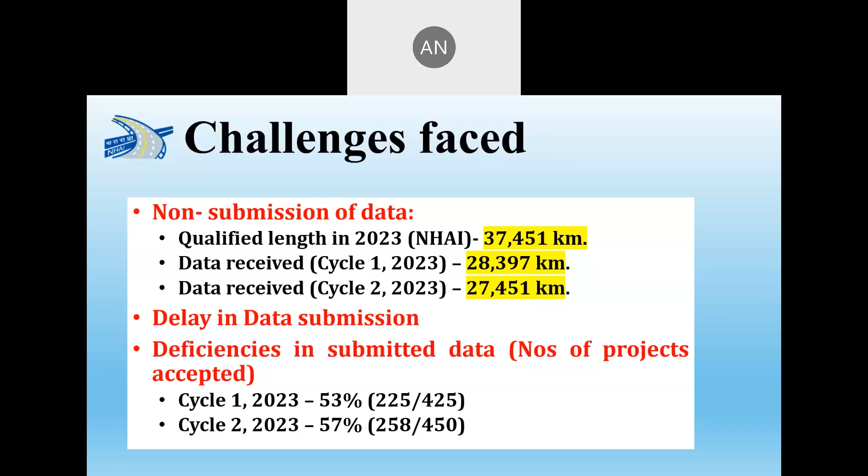हमारे पास 3 चैलेंजेस हैं। एक तो जहाँ पे डाटा कलेक्शन करना है वहाँ डाटा कलेक्शन नहीं हो रहा है। जैसे आप देखेंगे 37,000 किलोमीटर में हमको 2023 में डाटा कलेक्शन था, एक 27,000 है, एक 28,000 है। मतलब यहाँ पे भी हमारा कम से कम 30% डाटा अभी आज के डेट में भी कलेक्शन नहीं हो रहा है।

उसके बाद जो डाटा आता है, उस डाटा की टाइमिंग और एक्यूरेसी इतनी खराब है। रीजनल सेल में उसके बहुत सारे डाउट्स और क्वेरीज आते हैं। उस क्वेरीज को करेक्शन करते-करते इतना टाइम लग जाता है कि ये वैलिडेट होते-होते कभी-कभी अगला साइकिल आ जाता है।

तो उसका मतलब क्या होता है, मोस्ट ऑफ द केसेस में इट लूजेज इट्स रिलेवेंस। मतलब जिस पर्पस के लिए हम डाटा को यूज करना था, जिस पर्पस के लिए उस डाटा से हम लिवरेज करने का सोच रहे थे, वो सब खत्म हो जाता है।

बहुत ज्यादा पीछे पड़ने के बाद, चेयरमैन सर ने भी कई बार इसके ऊपर मीटिंग की, इतने बार करने के बाद भी आज 37,000 किलोमीटर में से सिर्फ 27,000 किलोमीटर डाटा आया। तो इसी चीज को देखते हुए हमारा रिक्वेस्ट रहेगा कि फील्ड ऑफिस में ये जो डाटा है, इसे कलेक्शन करवाना ही करवाना है, चाहे AE के थ्रू हो या IE के थ्रू हो या आपके पास NSV की ऑलरेडी एम्पानल्ड एजेंसी के थ्रू हो।

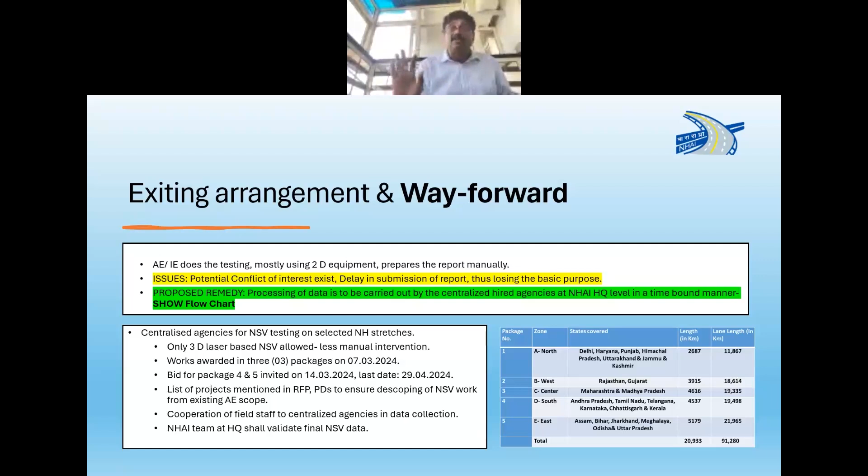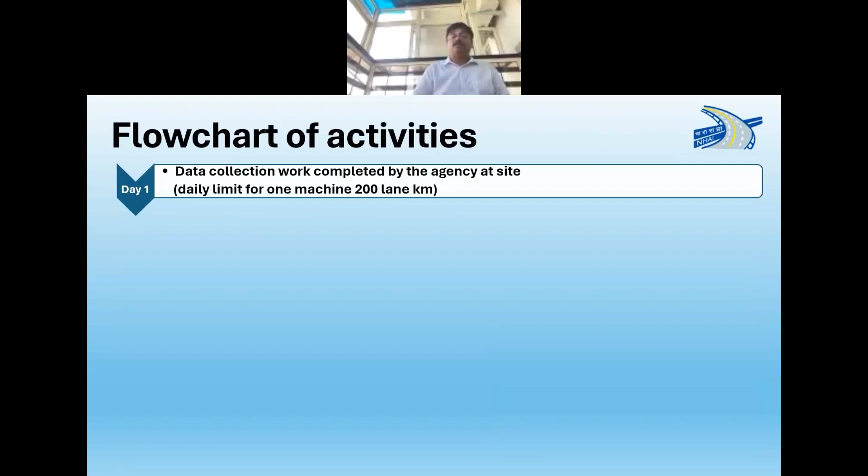अब इसे कैसे करना है, नेक्स्ट करना। इसे टाइम बाउंड मैनर में करना है, क्योंकि पुराने में खामियां क्या थीं, डाटा कलेक्शन में बहुत खामियां होती थीं। अब हम क्या करेंगे, डाटा कलेक्शन जो करेगा, जो डाटा आज कलेक्ट करेगा, इट मस्ट रीच विदिन अ डे।

अगले दिन ये क्लाउड के बेसिस पे या स्पेशल कोरियर के साथ ये डाटा हमारे हेडक्वार्टर में पहुंचेगा NSV सेल में। उसके साथ 4 दिन के अंदर उसका डाटा एक्सट्रैक्शन करेंगे, प्रोसेसिंग, प्रिपरेशन और रिपोर्ट तैयार कर देंगे। जो 8 दिन में, जो आज 6 महीने लग रहा है और आज के डेट में भी एक्यूरेटली नहीं हो रहा है, उसे हम 8 दिन में करने का एंडेवर कर रहे हैं।

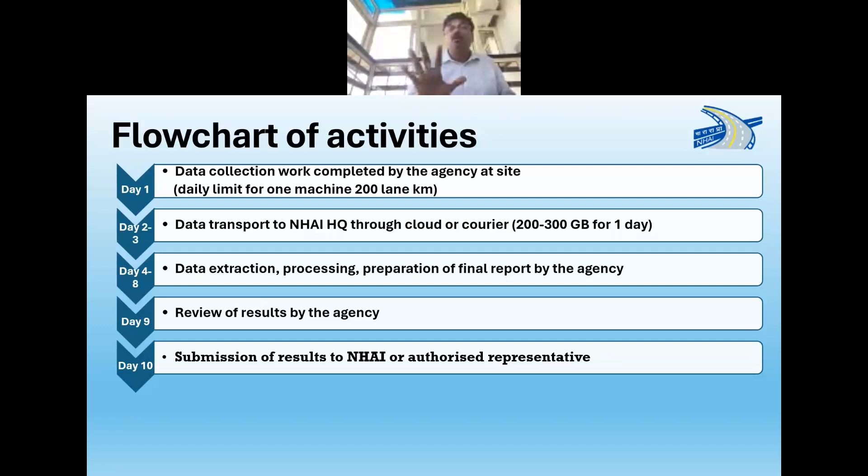उसके बाद 1 दिन में उसका रिजल्ट रिव्यू करेगी एजेंसी जिसने काम किया है, उसके बाद वो डाटा 10वें दिन NHAI को सबमिट कर देगा, जो वैलिडेटेड डाटा है। उस डाटा को वैलिडेट करते हुए हम इमीडिएटली उसे डाटा लेक में डाल देंगे, और डाटा लेक में जो प्रायोरिटी मेंटेनेंस मॉड्यूल है आज की डेट में, जिसमें 4 एट्रीब्यूट आज हम लेने की कोशिश कर रहे हैं।

रफनेस, रटिंग, पॉटहोल और क्रैक्स, ये चारों बिग एक्यूरेट डाटा के साथ आ जाएंगे। और इस डाटा के साथ हम प्रायोरिटी मेंटेनेंस मॉड्यूल के साथ इसे लिवरेज कर देंगे, लिंकिंग कर देंगे।

और प्रायोरिटी मेंटेनेंस मॉड्यूल में ये जो डाटा आएगा, उसमें ऑलरेडी हर एक कॉन्ट्रैक्ट के शेड्यूल के हिसाब से क्या-क्या रिक्वायरमेंट है वो भरा हुआ है। मतलब बताया हुआ है पॉटहोल कितने दिन में करना है, रटिंग के लिए कितना अलाउड है और कितना परसेंटेज हो सकता है, क्रैक की कितनी विड्थ, कितनी डेप्थ, कितना परसेंटेज अलाउबल है, और रफनेस कहीं 2400 है, कहीं 2750 है, कहीं 2000 है, वो डाटा उसके ऊपर आधारित होगा।